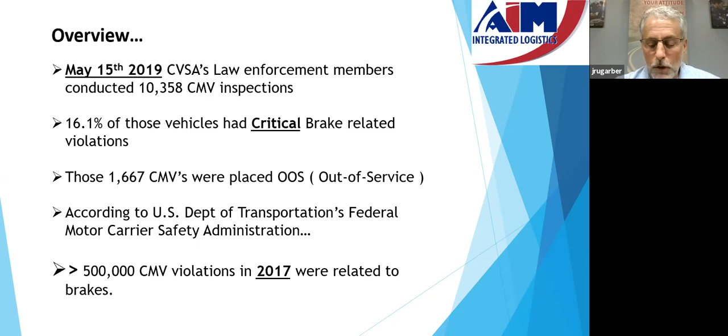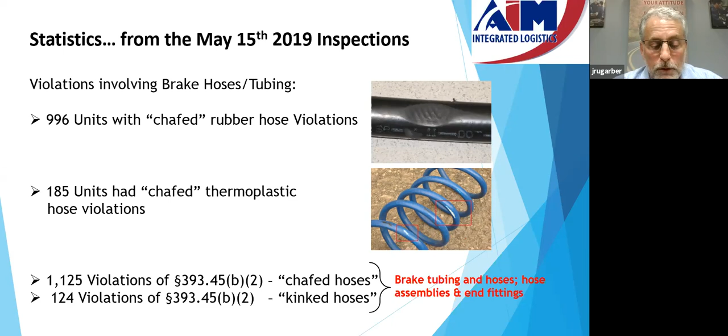Down at the bottom, 1,125 violations of 393.45B2 chafed hoses, and then there's another 124 of the same violation section under kinked hoses. And that would fall under brake tubing and hoses, assemblies, and end fittings.

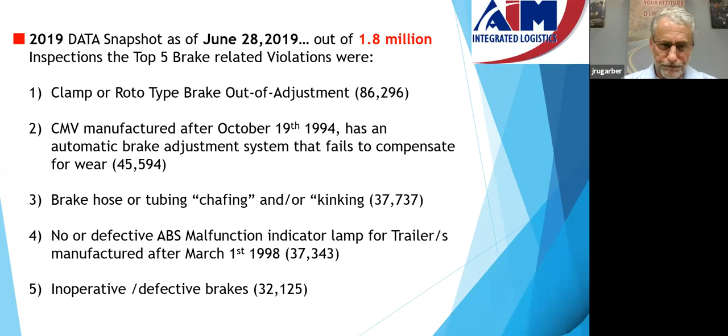All right, CSA Impact. Again, CSA could be an hours-long conversation. I won't try to take up too much of your time on that. We're just going to focus on the vehicle maintenance basic of CSA. There's 7 basics within the program, but we're just going to focus on the vehicle maintenance.

393.40 through 393.55E, that is the group they consider brakes and all others. The severity weighting, most all the brake violations are going to be at 4 points. Just as an aside, if you're placed out of service, they will add an additional 2 points onto that particular violation. So in that total section 393, there are 62 total violations.

If you remember earlier in the second, third slide possibly, under DSMS, there's the definition, driver's safety measurement system. The driver is only responsible for 39 of those violations out of the 62. Under the carrier safety measurement system, the carrier itself is responsible for all 62 violations.

So it's in the best interest of the company and the driver to make sure that the trucks are kept in good repair, that the brakes are adjusted properly. And Aaron will follow up on that when I'm finished my presentation. He'll give you a little bit more detail on what's needed.

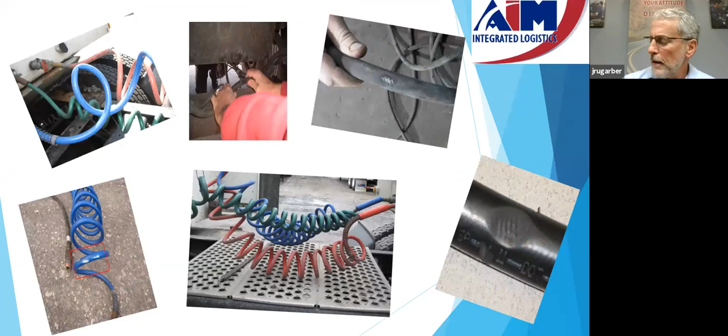This next slide, I've included a number of pictures here. These are pictures actually that I've taken, from our trucks over probably the last 10 years or so.

If someone isn't familiar with what a kinked airline looks like, up in the upper left-hand corner, you can see that blue airline. That would be considered a kinked airline. It restricts the airflow, could cause your brakes to drag, could cause a fire, and could cause loss of cargo, trailer, or the entire unit itself.

The picture in the middle is one of our drivers holding a hose for me. There's a slice in that, it was rubbing up against a bolt. The upper corner on the right-hand side, another hose worn down to the cloth. Definitely out of service on that particular hose.

The lower left-hand corner, another picture of that blue airline with the white spots worn in it. Again, an out of service criteria on the thermoplastic nylon lines.

Part of that problem occurs because of the middle picture. If you guys are running across any of your trucks, if the springs are worn out, the pogo stick is broken possibly, the cords are too long, you want to get those up off the catwalk. They are not meant to be laying on the catwalk and rub around, and then now you have a white spot in your hose. The officer looks at it, sees the white spot, and now you're placed out of service.

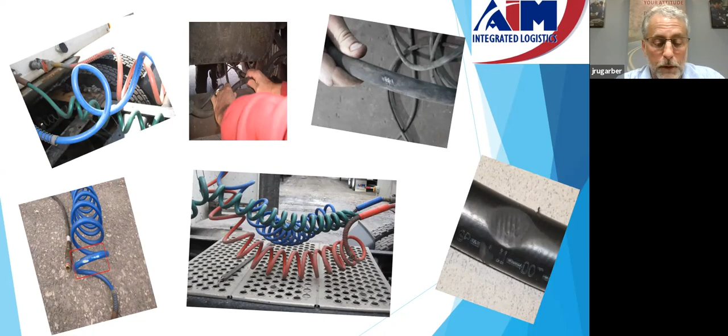So I'm going to add something that's called Operational Policy 15. Commercial Vehicle Safety Alliance, every year they have big meetings and decide what out of service criteria is going to apply to certain things. They get feedback from drivers, carriers, stakeholders, just getting their input on what they think should and should not be in that particular book.

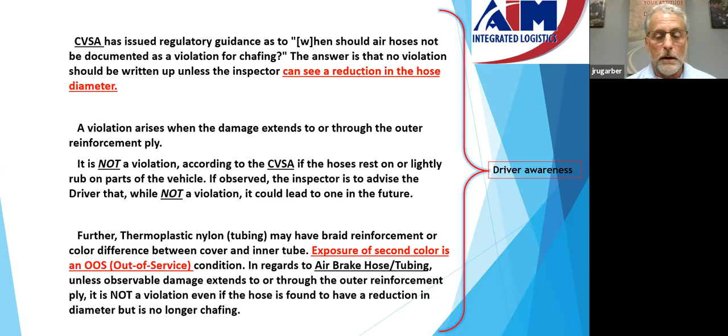The last paragraph: thermoplastic nylon tubing may have braid reinforcement or color difference between the cover and inner tube. That whole paragraph has to do with the red and the blue lines, where you could see cloth or that white spot coming through with a braided area. Again, that would be considered an out of service on that.

An interesting thing that was kind of hidden in the regulations, we don't often get written for it, but it is possible. The non-metallic brake tubing, coiled non-metallic brake tubing, may be used for connections.

They're talking about the airlines between the tractor and the trailer. That spring area on both the tractor side and the trailer side needs to be butted up against that brass fitting of the glad hand. They are not tack welded on, they're pressure fitted.

If those springs begin to slide down, it allows that hose to kink much easier. For anybody that does any plumbing work, you know that you never try to bend a plumbing hose or tube without a pipe bender, or it will tend to kink. So that's the same principle that applies to that spring.

So from a maintenance perspective, if you see that spring sliding down off of the hose end, you either want to tighten it up or replace the hose itself. So if a driver comes to you and explains that, it'll be well worth your time to replace that hose or fix that for him.

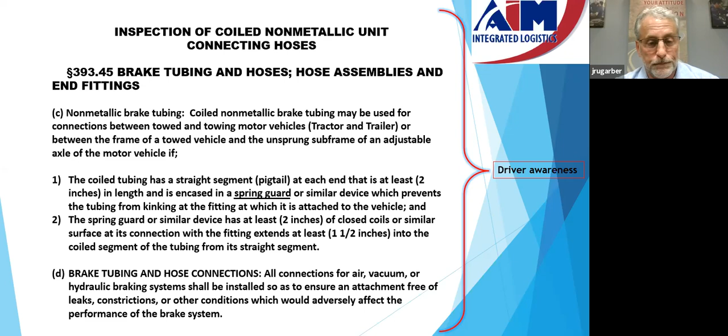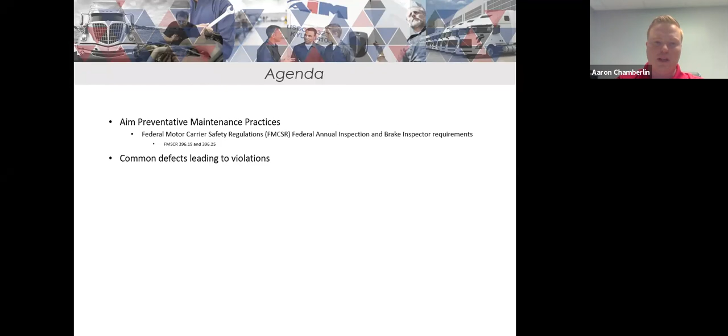Again, as I said, preventative maintenance—how we play a role here is where we can hopefully provide you minimal exposure out on the road. Again, I'll talk through a couple of the maintenance things that we do.

Areas specifically related to the brakes that we cover on our preventative maintenance inspections take place in multiple areas of the vehicle. In the cab, we're checking a lot of the things that drivers also check daily—verifying the trailer hand valve operation, tractor and trailer protection valves, parking brake operation, testing low air warnings, governor cut-in and cut-out, checking air pressure gauges between the tanks, primary and secondary—and then in and around underneath the vehicle.

This is a big one. John showed some really nice examples there of air hoses. What we're checking for is the condition of them, looking for any chafing or wear, but the critical piece is that we're checking the routing and securement of those so we can prevent them from wearing.

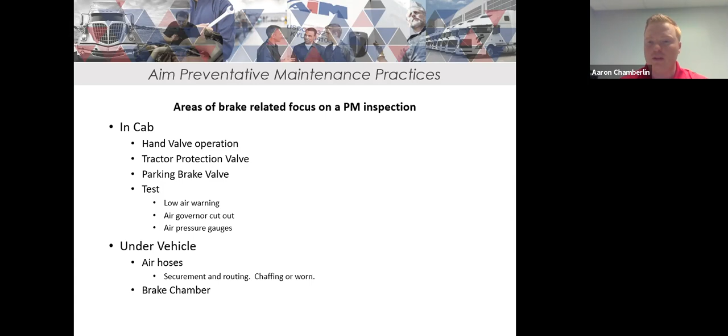We're inspecting the brake chambers, looking for broken springs or wear while it's in for preventative maintenance. Also brake stroke—we're checking operation of the slack adjuster. We compare the brake stroke measurements across axles, across the vehicle, and check proper lubrication of the slack adjuster to make sure it's working properly.

Again, a common issue—we're checking the brake lining or pads, depending if it's disc brakes or drum brakes. We're recording those lining measurements, making sure that the preventative maintenance intervals we have in place mean we should have no issue running until the next preventative maintenance before replacement would be required.

We're checking the air tanks, the cords, lines, wiring, and valves at the air tanks, looking for any kind of corrosion. When we drain the tanks, we're looking for moisture in the tanks, trying to prevent any issues there. Along those lines with moisture, we're also looking at the air dryer and the automatic purge valves.

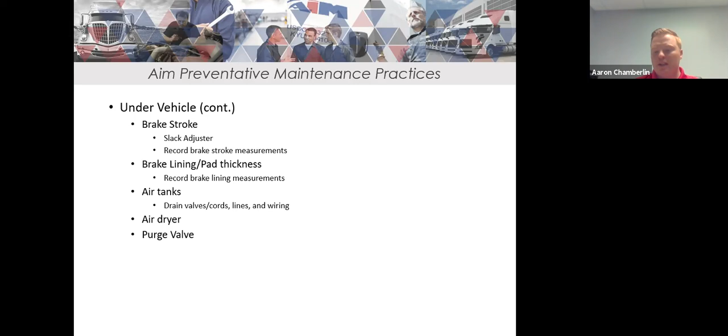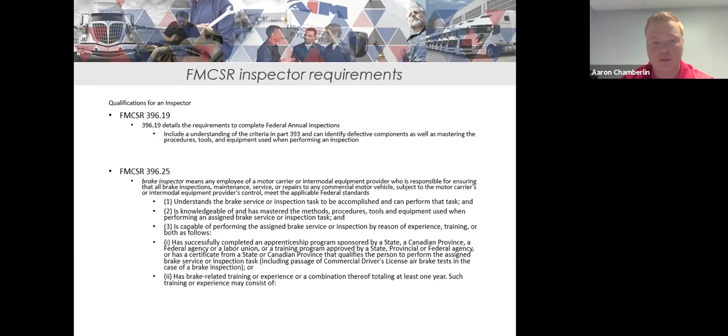As I mentioned, the federal motor carrier safety regulations have specific requirements for who can do an annual inspection, which our preventative maintenance inspection meets, as well as being a brake inspector. I've referenced the regulation numbers there, and you can read through these, but specifically speaking to brakes, a brake inspector is typically an employee of a motor carrier or a provider, what we are. They've demonstrated knowledge of the braking systems and tools and equipment required to service those. We've either put them through some programs combined with work experience to meet requirements, and then we keep a list. We have certifications on file, and we measure those to make sure that we're in compliance.

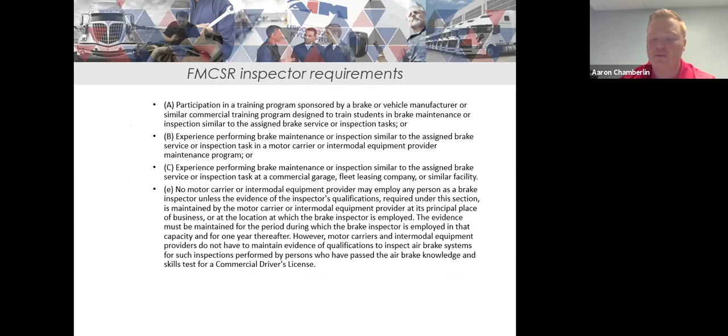Again, here are some more details about what our inspectors have met. We're hoping that you rely on AIM as a service provider, so that you don't really have to worry about these things, and the drivers can focus more on these brake areas.

Again, common brake-related defects that John mentioned there, chafed airlines, or he showed you some pictures of kinked ones, or any issues with the different types of airlines you have. A driver, again, proper routing and securement, most of the time that's going to be keeping them up off the catwalk or reporting those, not necessarily getting under the vehicle, but definitely all of these are important pieces if you follow a detailed PM program.

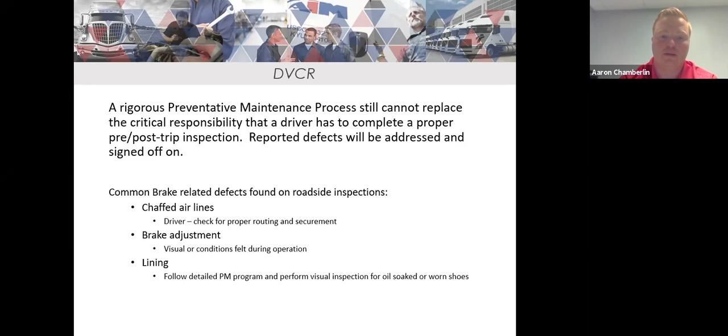That's really the main thing the service department here can help you out with as it relates to Brake Safety Week. I think the two slides together probably arm you with some good information to go back to your driving force with, and we'd certainly be happy to help you out with all of your maintenance needs and remove some of this worry from you, let you go out there with reduced exposure.